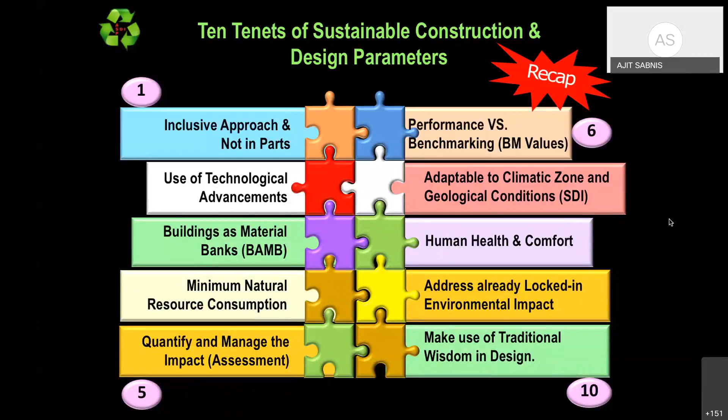We also discussed several important definitions and terminologies, and I intentionally left two or three important ones like embodied energy, embodied carbon, life cycle analysis, which we will take up now. But before we get to the actual definitions, I would like to see what exactly is the objective of the environmental management plan, which we call EMP.

To prevent or mitigate the damage to the environment due to the project by adopting best environmental management policies and practices specified in the contract and legislations gazetted by the Government of India.

Environmental management plan is a tool to implement environmental safeguard measures. EMP is derived from the outcome of the environmental impact assessment, which we are yet to see. So it is entirely based on the environmental impact we assess.

Section 202 of the Environmental Protection Act states that the purpose of EMP is to propose environmental protection commitments to assist the administering authority to prepare the final policy. This means incorporating and integrating the environmental management plan in our EPC becomes very critical in future.

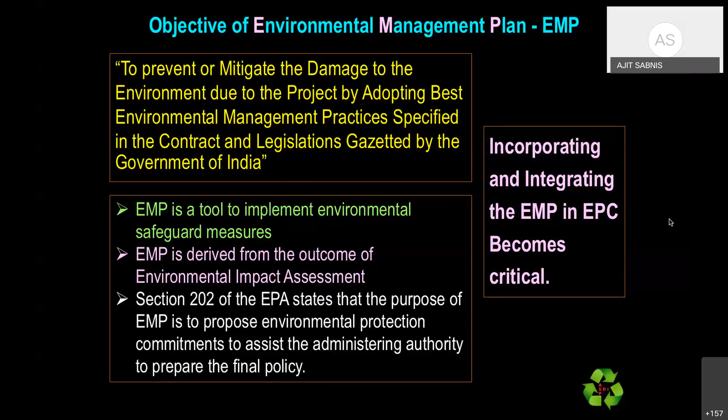Now, there was a question in the last session as to why so much focus is only on buildings and not on some of the infrastructure projects. So dear friends, this is the answer.

For example, domestic, commercial, and industrial energy consumption put together comes to about 73%, as you can see in the pie chart. That is why the focus is on buildings, which is actually concentrated more in the urban scenario.

When we take up national infrastructure projects, majority of them are exclusive projects where their function and service is looked into, and they do not come under the purview of the exact sustainability aspect, in the sense of the damage they create to the environment.

Am I audible, Rangna? Yes, yes. Rangna, kindly mute. Mute again.

So, dear friends, this is why we focus more on buildings.

Roads, for example, one important factor that affects the environment through a road project is habitat fragmentation, what we call it when it separates two habitats residing on two different parts of the road, creating a lot of confusion, especially in animal species. So habitat fragmentation is an important factor, and it's altogether a different scenario as far as the sustainability assessment of infrastructure projects, particularly roads and bridges, is concerned.

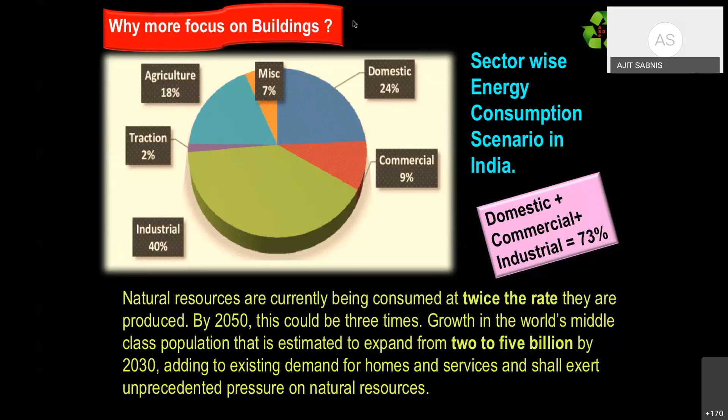Now, let us go to the next slide. What exactly is embodied energy? Embodied energy is the total...

Embodied energy is the total non-renewable energy that goes into the manufacture of a material from its extraction till it is consumed. It plays a very important and critical role in the choice of building materials.

This embodied energy gets classified into initial embodied energy, recurring embodied energy, and end of life energy. Initial embodied energy is the energy consumed in the entire process from the acquisition of raw materials to the construction of the building.

Let us take ceramic tile, for example, which is a very common flooring material used very commonly. What does it take for preparing ceramic tiles to come to us and get used in construction? To make ceramic tiles, we need the raw material and the processing of raw material.

Then it undergoes the manufacturing process, then it gets packed and delivered to the site. Now, the entire energy consumed in this process, whether it is fuel energy or electricity, power generated by clean energy processes or by burning fossil fuel, anything can happen.

All that energy included together, till the product comes to your site and gets implemented and consumed, that is the initial embodied energy. The recurring embodied energy is the energy consumed to maintain, repair, restore, and refurbish or replace the material components.

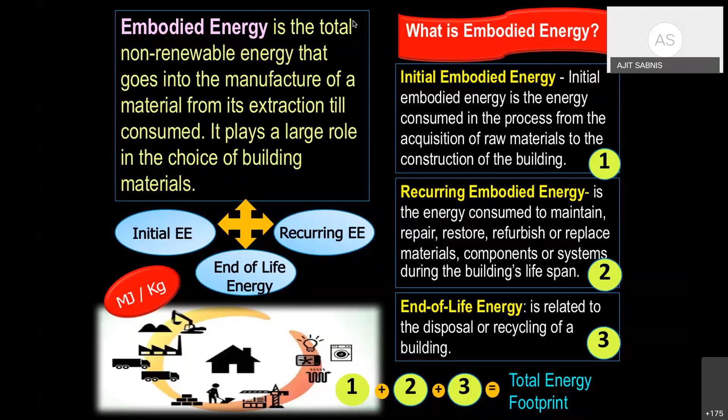Now, this is embodied energy. Now, what exactly is embodied carbon? Embodied carbon is the carbon footprint of a material. It considers how many greenhouse gases, or what is the quantum of greenhouse gas, that is released through the supply chain. Carbon dioxide is significant as explained in the first class - it is one of the most significant gases among the greenhouse gases, and it is often simply referred to as carbon emissions.

This embodied carbon is always expressed in terms of kg CO2 equivalent. That is because while taking all the other equivalent greenhouse gases into consideration - and we also talked about global warming potential in the last class - everything is converted and expressed in terms of kg CO2e per kg. It is estimated that about 0.098 tons of carbon dioxide is produced per gigajoule of embodied energy. Now, here I take a pause.

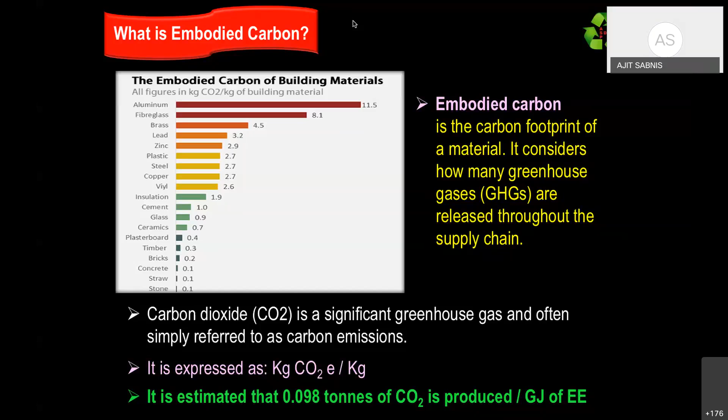Now we know what is embodied energy and what is embodied carbon. Let us look at what exactly is life cycle analysis, acronym normally LCA. This life cycle analysis can be applied to a product or several other things, but when applied to buildings, it can be defined as a method of assessing the sustainability levels of buildings and infrastructure projects from the pre-construction phase to the demolition phase, satisfying the cradle to grave principle.

So we also talked about the four principles: cradle to site, cradle to gate, cradle to grave, and cradle to cradle. Once we understand this in general, there are quite a few methods adopted in doing the life cycle analysis of buildings. But three of the common LCA methods are process analysis, input-output analysis method, and hybrid analysis.

Now, in the process analysis of LCA, what is involved is the data related to each of the processes starting from raw material extraction is taken into consideration and applied.

Now what happens is we really don't know - this non-availability of reliable and admissible data is actually one of the biggest problems, not only in India but any part of the world. It's extremely difficult to exactly monitor and get admissible data for what exactly happens for each event, and for every utilization - whether it be extraction, or whether the equipment doing it is efficient - all these things come into the picture.

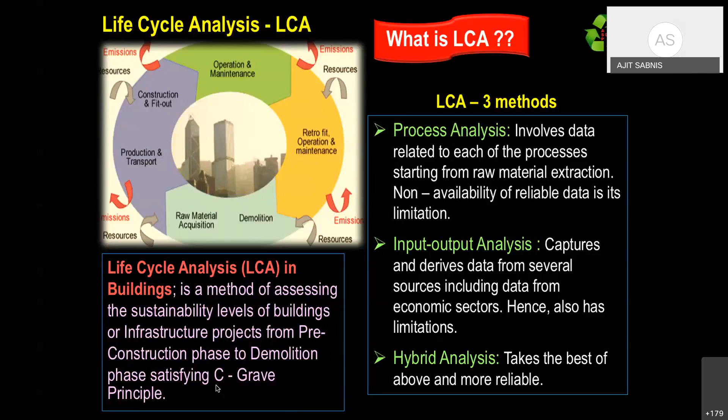Now, I would take the example, I hope you can all recognize this, Antilia, Mumbai, one of the world's most expensive homes. That is Ambani, Mukesh Ambani's residence, and this is the screenshot of Altamount Road, Mumbai, where you can see the helipad.

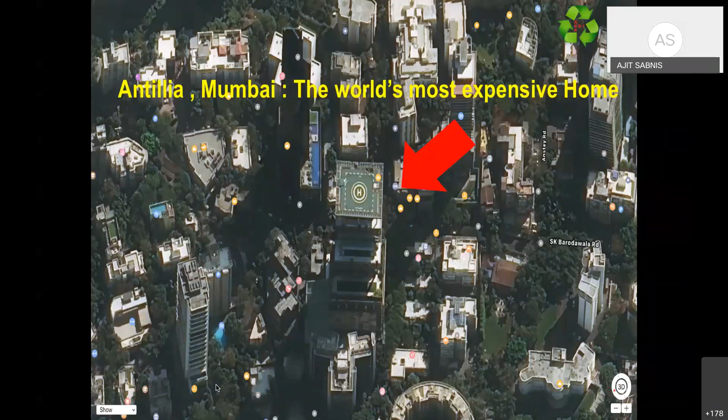Now, what is the detail available to us? You can see that this is one of the costliest places, and almost all buildings in and around this particular building are high-rise buildings. We all know it is one of the world's most expensive homes as per the Forbes interpretation.

Dear friends, it would be extremely wrong on our part to analyze such kinds of buildings and then normalize them or bring them to the common strata. It is not possible; we will have to eliminate these kinds of buildings. For example, Burj Khalifa - all these become iconic structures, never built with an idea to be sustainable. They just want that building to be the tallest in the world, period. So these are iconic structures which cannot actually be understood.

But out of curiosity, out of academic interest, I did this exercise and am placing it before you.

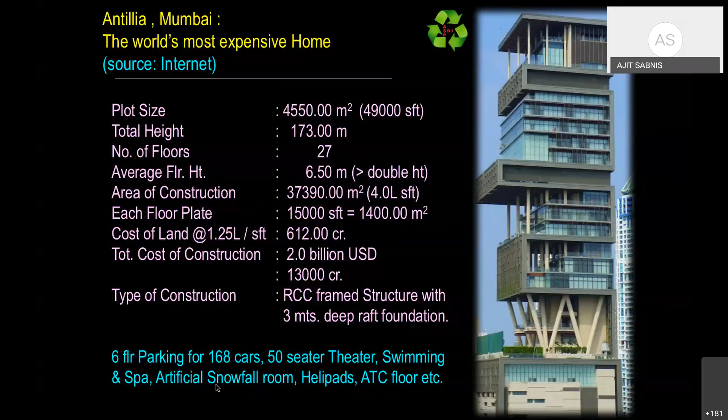At 173 meters, we normally go up to 58, 50, 60 number of floors, but here it is almost about 27 floors. Now, what do we get from this? What kind of analysis can we draw from this?

Now, look at this particular thing. We have understood that after accommodating for the cost of the land, consultancy fees and all those things, the approximate cost of construction could be about 11,500 crores. When we divide this, the cost of construction per square meter works out to be about 2.86 lakh per square foot.

Now, let us leave this cost aspect a little aside, because in this particular analysis, these cost stimulants do not come into the picture. Though it is an extremely important factor, when we analyze buildings using an embodied energy or embodied carbon perspective, the cost stimulants of the real estate do not come into the picture. That is why the United Nations Environmental Program insists on locally developed sustainability development indices, which we will come to later. Only from the embodied energy perspective, now look at this.

All over the world, for extremely opulent residential RCC buildings, the embodied energy ranges from 9,000 to 15,000 megajoules per square meter. So I have taken the least component here. Even taking about 9 gigajoules per square meter, the total embodied energy impact comes to about 336,510 gigajoules, which approximately is about 33.65 crore megajoules.

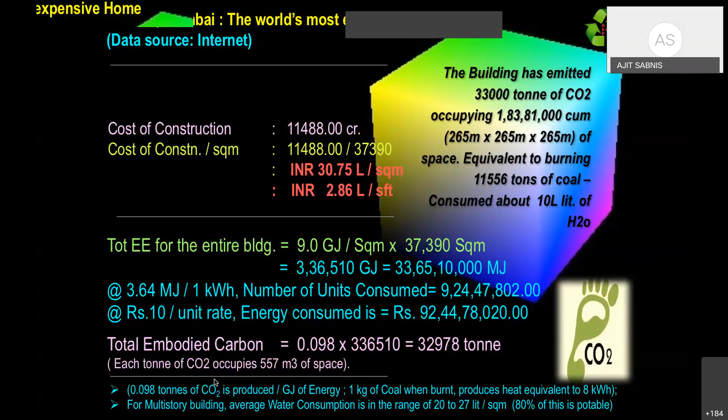Now, when you convert this into the number of units - we have 3.64 megajoules making 1 kilowatt hour, which is 1 unit of electricity - the number of units consumed is about 9 crores 24 lakhs 47,802, which at the rate of about 10 rupees, applicable for the commercial rate, means this building consumed about 92.5 crores worth of electricity during its entire construction period.

Now, for the total embodied carbon, assuming the thumb rule that about 0.098 tons of carbon dioxide is produced per gigajoule of energy, the total embodied carbon or greenhouse gas emitted by this one building is about 32,978 tons - meaning this one building has emitted about 33,000 tons of carbon dioxide, occupying almost 2 crore cubic meters of atmosphere, approximately equivalent to a space of 265 meters by 265 meters by 265 meters.

And it is equivalent to burning 11,556 tons of coal and consumes about 10 lakh liters of water.

And most of it is potable water, even assuming some treated water has been taken into consideration. Normally, 80% of the water is taken as potable water. This is on the assumption that for any typology of building, the average water consumption during the construction phase, the average construction consumption of water is about 20 to 27 liters. So this is a very approximate analysis of one building based on the data that is just available.

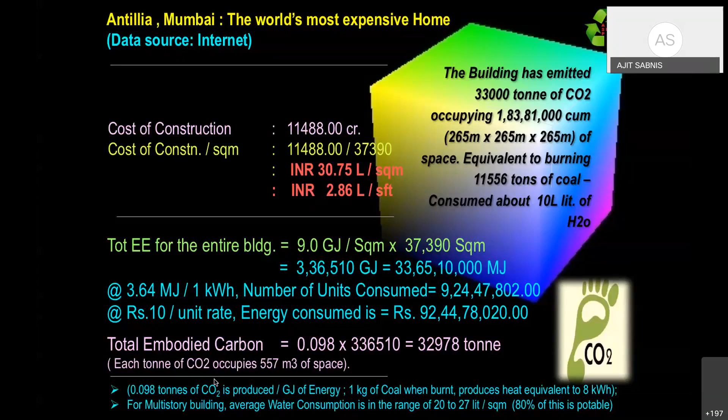Once this comes into the picture, this is for one building, and if a similar exercise is done for the cluster of buildings in that area, we actually know what damage the entire built environment is creating. Now, we will go to the next part of the analysis.

What is required is the sustainability assessment, and sustainability design calls for establishing what are called baselines. We call this establishing a benchmark, like we have a benchmark in surveying which becomes the referral point. Now we have the values of the benchmark building, and this is establishing baselines for further assessment and comparison.

The United Nations Environmental Program, from time to time, indicates what the benchmarks could be, or also gives the flexibility to choose at the discretion of the designer to select his own benchmark project. This means that, taking climatic conditions, local environment, availability of local materials, and entirely localized parameters into consideration, a designer has the flexibility to evolve his own benchmark project or benchmark baselines.

In this particular figure, the comparison helps show improvements in the overall energy performance of a building under assessment, and real energy performance values as compared to baseline values provide an indication of the sustainability level of a building in relative terms. Benchmarking of buildings provides a set of measurable baseline values that can be compared with the real-time energy performance values of a building to be assessed.

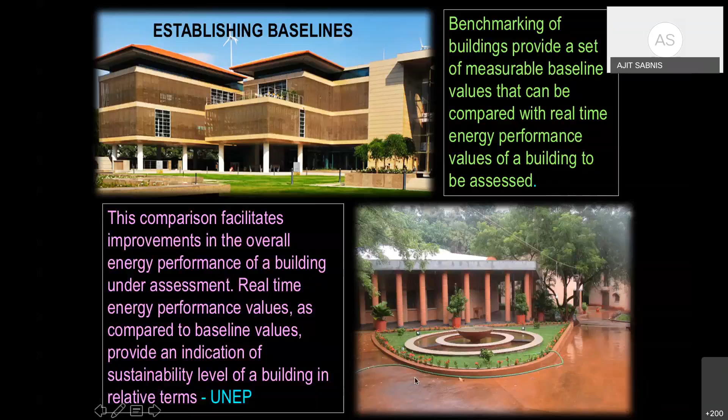Once we establish the benchmark, it's important that it also be evaluated by a set of certification programs. For example, any benchmark project we decide upon can be compared right now with available green building ratings, to check whether the building chosen fits into the bracket correctly. That evaluation of the benchmark project has to be done in comparison with already existing procedures.

For example, the one building which I had taken, we compared it with LEED certification credits. LEED certification has a maximum of 110 points, and the benchmark project we took earned about 101 points, which means it falls into the platinum category. We don't just look at numbers, but as I've repeatedly said, all green rating systems, or at least most of them, are criteria based.

However, they point us and take us through our journey toward sustainability in the proper direction, putting us on the right track. That is how these systems are extremely helpful, so cross-checking with established criteria can help.

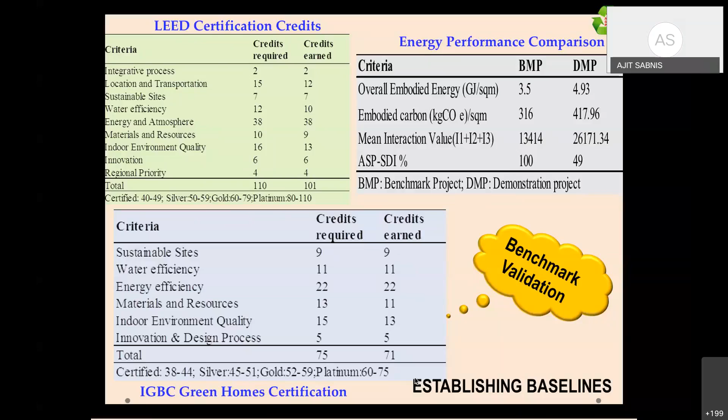For example, the project we took into consideration, the Antillia, comes to about 49% against 100% as against the benchmark project which we have taken. These are just an indication, to tell you indirectly how to go about it. So the benchmark project has to be evaluated with reference to other criteria also.

Just for the sake of this, there are green building ratings, almost quite a few. There are almost about 64, 65 well-known green building rating systems. Suppose we take out of which BREEAM, CASBEE of Japan, LEED of USA, Indian Green Building Council IGBC, and GRIHA of India, HKBEAM of Hong Kong, BREEAM of UK, Green Mark of Singapore. All these are actually quite well-known green building rating systems.

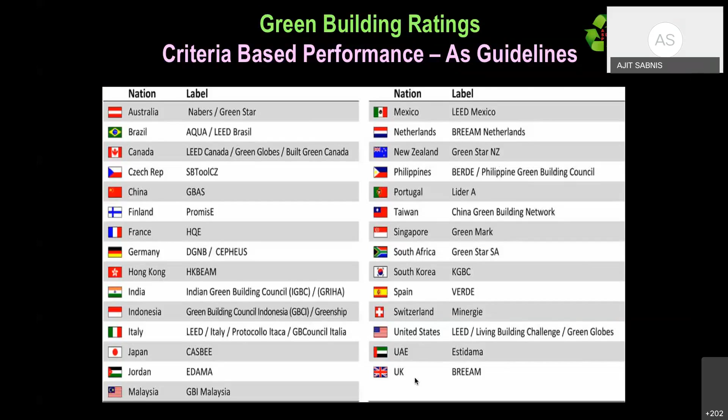What exactly are the green building rating systems, and why do we base only on criteria-based marking? We will just look at this. I've taken the IGBC rating criteria for homes, for home buildings. Now, these are the criteria.

For example, local building regulations compliance is required, that means it is mandatory. Without local building regulations, your building cannot even be rated. Then soil erosion control is mandatory. There are about 9 points as far as site conditions are concerned, as we can see it - topography and vegetation, heat island effect, roof insulation, all these different parameters. So totally about 9 marks for sustainable sites.

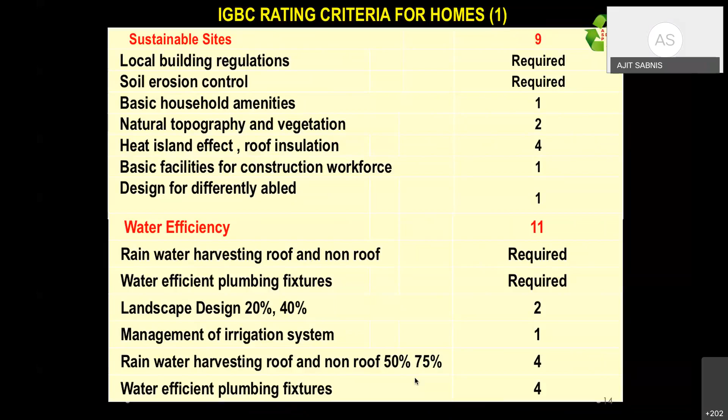For water efficiency, we have rainwater harvesting, water efficient plumbing fixtures, whether you have adopted landscaping, management of irrigation system, rainwater harvesting, water efficient plumbing fixtures, all these things. These are different criteria which we adopt, and then arrive at some kind of rating system, whether the building is X rated or Y rated.

And once we understand these ratings, we try to adopt the mitigation strategies. How can we go further? Now let us look forward.

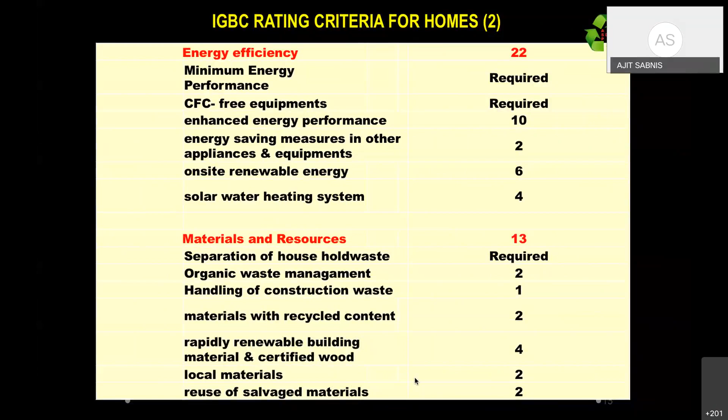This is again a continuation of what exactly is the material resources. Now, what we see in these things is, if you don't carry out certain criteria, you lose those marks, isn't it? So what is important is, there is a possibility that we can do this at the conceptual stage or the design stage, but all the stakeholders involved have to come together and take part. And one of the important sustainability design aspects is actually...

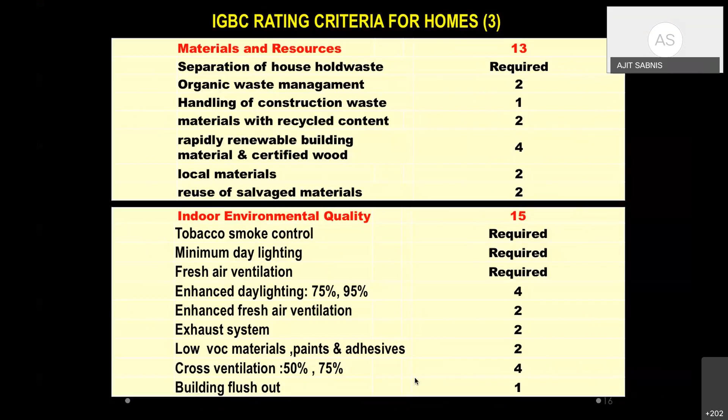To be very frank with you, the structural analysis algorithms do not change at all. What actually changes are the materials, and the properties of the materials that you use. The structural analysis part remains the same. So the loading pattern may change, loading may come down, but all other analysis remains the same. What actually has to change, I would put it that way, is the mind shift from linear to circular construction.

We already discussed in the last talk what exactly is linear construction and what actually is circular construction. Now, in the linear model, the feedback by the suppliers into the early designs - there is no feedback at all.

Site planning and design and approvals are done without suppliers or building contractor. Contractor is selected at a later date. Contractor selects the suppliers based on the approval of the suppliers, and if there is a list of approved vendors given by the client, that is taken into consideration. The end result is suppliers and constructors are normally not included in the overall design process at all, and they do not communicate with each other on the systems integration. This is one of the biggest drawbacks of the linear model.

Now, the circular model actually calls for entire transparency in the entire process, where everybody should be involved right from the beginning. The starting point here in the circular model includes even the potential suppliers and the constructors. Planning and designing include consultation with the potential suppliers and users. Transparency between all the stakeholders has to be maintained.

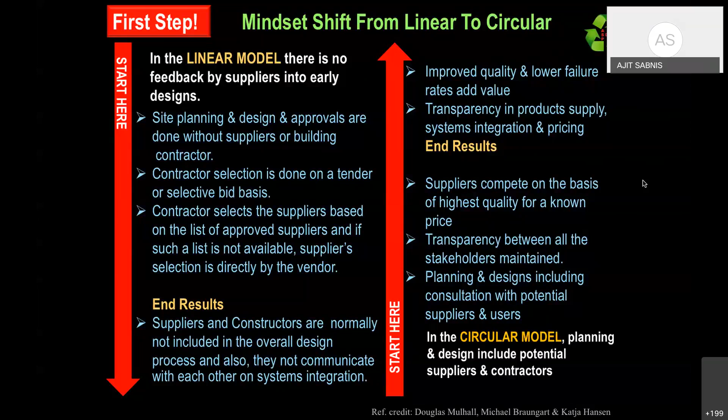Now, we have what is called RESOLVE. To begin with, this particular framework actually helps us to illustrate how the circular economy can be applied to sustainable design.

This RESOLVE stands for regenerate, share, optimize, loop, virtualize, exchange, etc. And regenerate is actually taking a shift from renewable energy and materials, to reclaim. All these things come into the picture, and this is one of the important aspects which we have to take while we apply the cradle to cradle basis.

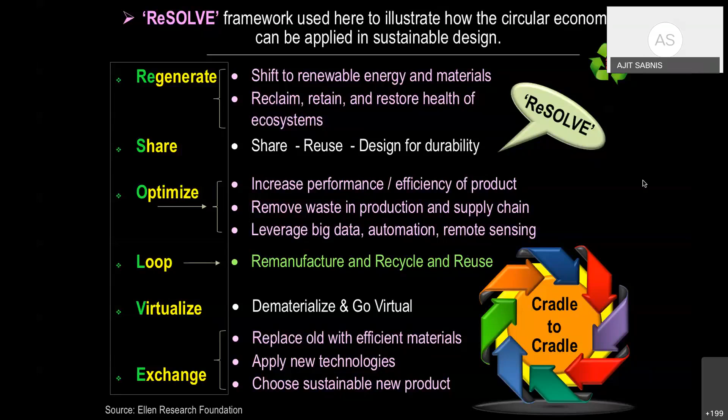This is another example of a low energy building, one of the community dining halls I was involved with. The embodied energy is about 3,600 megajoules per square meter, and embodied carbon is about 370 kilograms CO2. It's a regular RCC frame with concrete louvers completely integrated with the outside nature, and natural stones for the flooring. This is a typical sustainable, low energy building which we were dealing with.

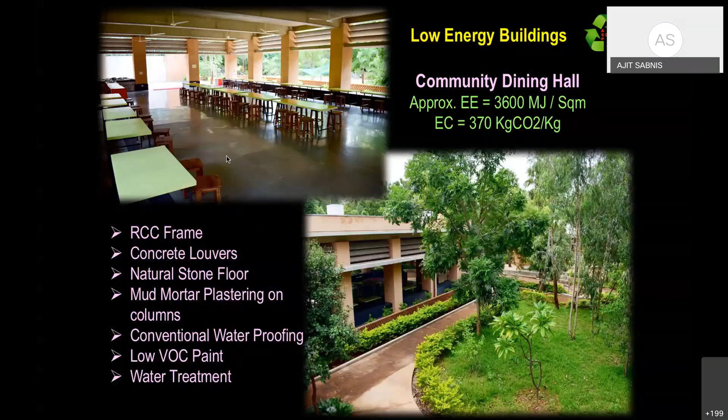Now let us see how do we peg the preliminary environmental performances. Let us begin with what exactly is step one and what are the different parameters we need to consider. The first and foremost important thing is to peg the preliminary environmental performance targets.

Now, what are those preliminary targets? Energy, water, materials, economic performance, landscape, indoor environmental quality, waste, and construction practices.

When it comes to energy, we can think of what kind of energy is used, what is the source of energy, whether it is a clean energy option, what kind of transport do you use, etc. When it comes to water, what kind of water do we use? Is it treated water, what kind of harvesting are we doing, and what is the way we are trying to conserve water?

When it comes to materials, whether it is recycled materials, salvaged materials, or locally available materials. When it comes to economic performance, the life cycle assessment, as already discussed, has to be done. And for landscaping, we need to understand the ratio of softscape and percentage of hardscape without affecting the microclimate, which we also discussed in the first session.

Indoor environmental quality involves the kind of air pollution, indoor ventilation effectiveness, air filtration, system commissioning for cleaning, and daylighting. All these things come into the picture as far as indoor environmental quality is concerned.

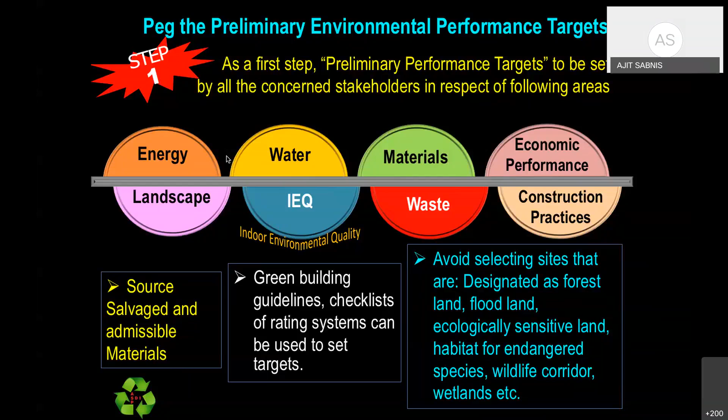All these things have to be considered. The second step is to protect or enhance the site's ecological integrity, which comes into the picture.

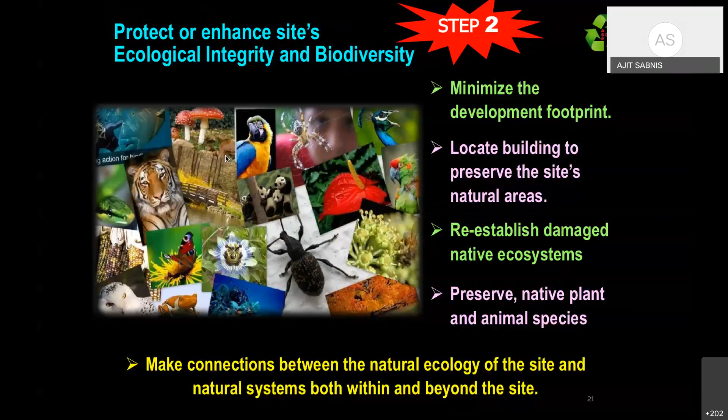Now we have to minimize the development footprint. This includes parking, building of roads, clusters of buildings coming together, then locating the building to preserve the site's natural areas, re-establish damaged native ecosystems, preserve native plant and animal species, and make connections between the natural ecology of the site and natural systems, both within and beyond the site. This is the second step which we take into consideration.

Install oil and water separators to treat the runoff from parking lots. Lot of methodologies to capture runoff water have to be taken into consideration. Design the roads and parking lots without curbs, or with curb cuts, so that the water can easily flow into the drains.

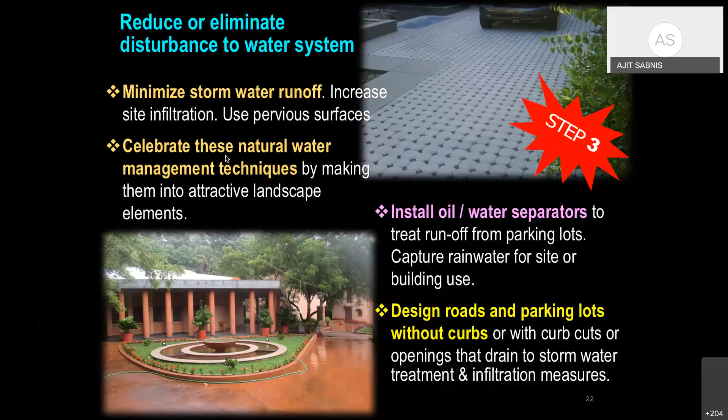The next important step is to prevent or reduce the use of potable water for irrigation. Rainwater harvesting comes into the picture. Use recycled storm water, or site-treated grey or wastewater, for irrigation. Use water efficient plants, often native species or species that have adapted. Use water efficient irrigation, including micro irrigation, moisture sensors, and weather controllers. Reduce urban heat islands, which we have talked about in the previous session also.

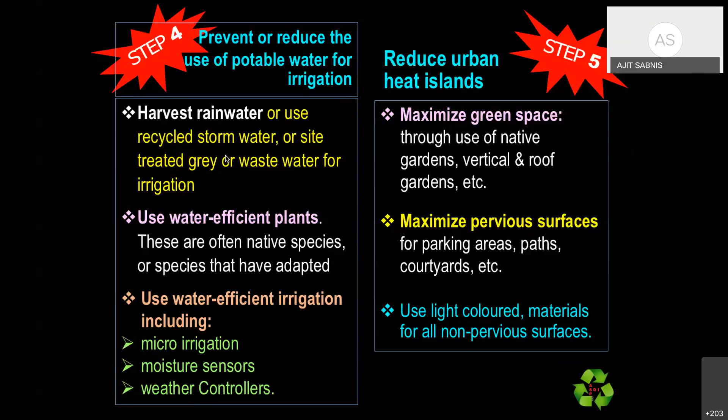This happens by maximizing the green spaces through the use of native gardens, vertical gardens, roof gardens, everything. And we also can maximize the pervious surfaces, as we talked earlier, use light colored materials for non-pervious surfaces, etc.

Now, one of the next considerations is the building orientation itself. Use existing and proposed trees and plantings to reduce heating. These plantings can actually reduce the summer solar gain, channel summer breezes, and block the winter winds while still allowing daylighting.

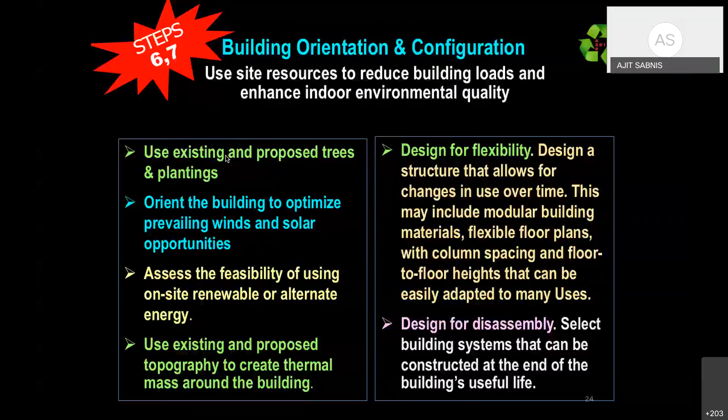I have put a little more data into the slide because subsequently, if this doesn't get completed, one can go through the slides and try to understand the whole concept of what exactly is the thing.

We need to give importance to locating internal spaces to optimize natural ventilation, daylighting, and site resources like trees or topography for shading, create operable windows where air quality is good and where prevailing winds will create desired internal pressures. All these things actually can be adopted.

Use low VOC materials and use structures that do not require finishes that emit volatile organic compounds.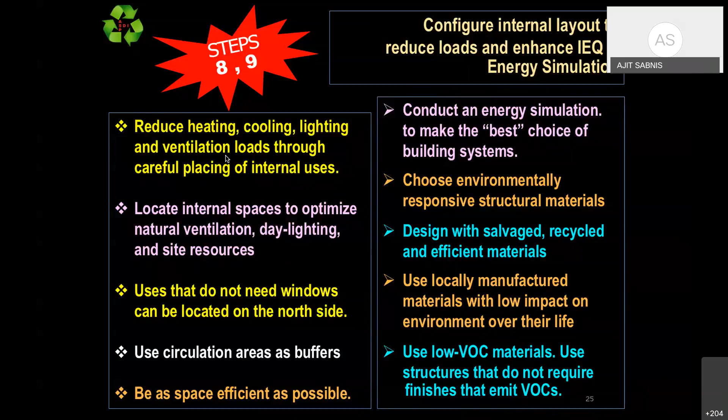Now, we also look into designing the envelope while optimizing the internal environmental quality. The envelope design takes paramount importance. While designing the envelope to bring in the daylight, use as much of the inhabited floor area as possible. Then design the envelope to provide adequate fresh air, which becomes extremely important.

These two projects that are projected, one of them the United Nations Environmental Project in Pondicherry, where I'm involved. It's a 4-bedroom, kind of a community guest house, and each floor has about 4 bedrooms. So we have an 8-bedroom building, and the total embodied energy we could achieve is 2,800 megajoules per square meter.

Whereas, as I said earlier, the typical concrete building, even with the frame, the building we see doesn't entirely contain an RCC frame. Yes, there is minimal RCC work involved. So instead of 9,000 megajoules, it is reduced to 2,800 megajoules. And instead of about 600 embodied carbon kg CO2 per kg, we could reduce it to 360 kg CO2 per kg.

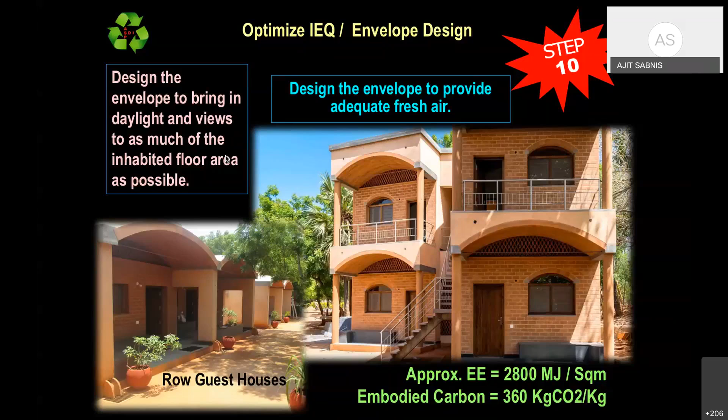So this is another important aspect other than envelope, which actually leads to good indoor air quality, and good indoor air quality encompasses factors such as maintenance of acceptable temperature that is good for human comfort, relative humidity, control of airborne contaminants, and adequate ventilation. All these things are actually required.

The indoor air quality also relates to the National Building Code, which talks about the minimum requirement of window to floor area ratio, and there is a very detailed table given for exactly what could be, especially about the fenestrations and the openings, the percentage of openings, what is comfortable to human nature, and these things can actually come into the picture.

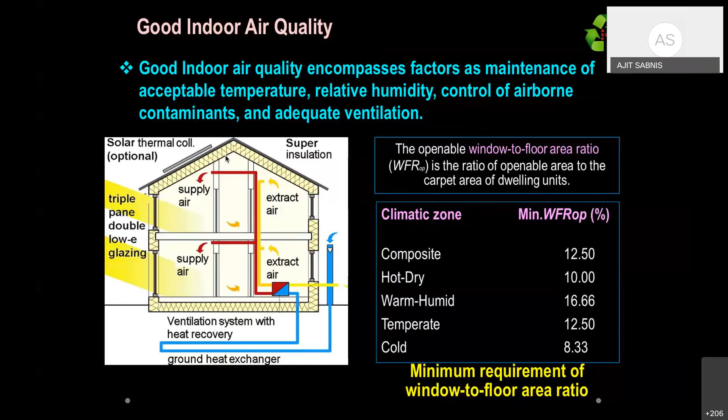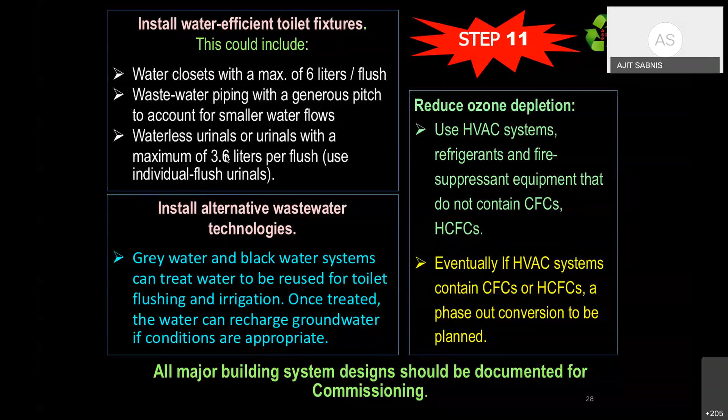How can we incorporate these strategies to reduce ozone depletion? That means use of HVAC systems, refrigerants, and fire suppressant equipment that do not contain CFCs and HCFCs. This has become a mandatory thing now, and HVAC systems containing CFCs are being phased out over time. All major building systems designs should be documented at the time of commissioning. This becomes an extremely important factor.

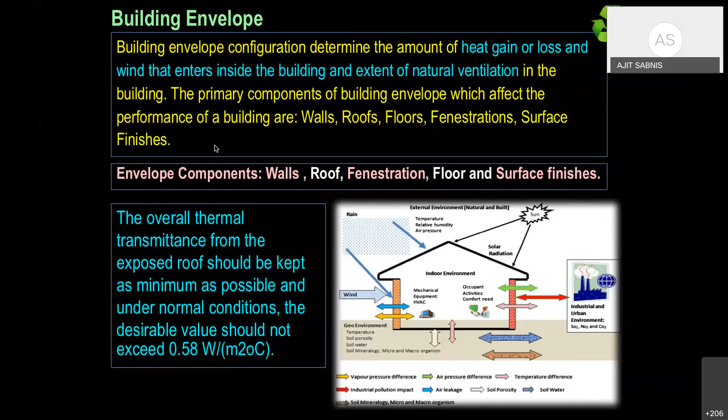Now, the building envelope is an extremely important aspect. This configuration determines the amount of heat gain or loss into the building, and the extent of natural ventilation that comes in. The primary components of the building envelope affecting performance are the walls, roofs, floors, fenestrations, and surface finishes. The envelope also imparts thermal transmittance from the exposed roof, which should be kept at minimum under normal conditions, with a desirable value not exceeding about 0.6 per meter square degree centigrade. This is one of the important criteria of building envelope to be considered.

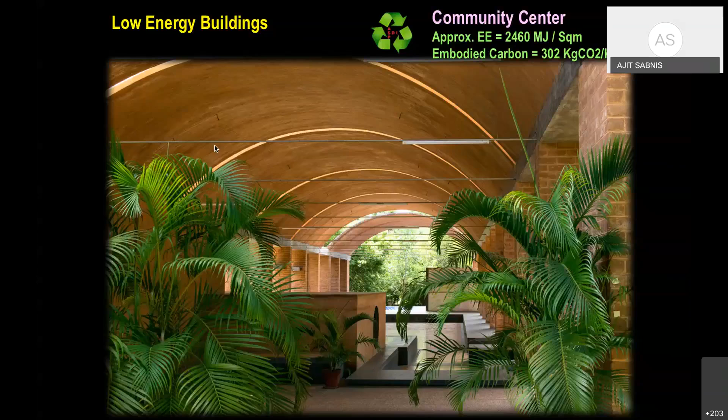This is another part of the community hall area shown earlier. In this community hall, we achieved about 2,460 megajoules per square meter, with embodied carbon around 302 kilograms CO2e. We ran cooling pipes in the flooring itself, so cold water circulates, hot water goes out completely, and cool water circulates to maintain temperature. Outside temperature is about 40-45 degrees, while inside is approximately 34-35 degrees, mainly because of the cooling and the shape, along with openings that allow cool breeze to come in.

Now we come to the alternative building materials which come into the picture. Before design, we need to consider what the alternative building materials are. An ideal sustainable building material is not only environmentally friendly, causing no adverse impact on occupant health, readily available, reclaimable, recyclable, and made from renewable raw material, but also uses predominantly renewable energy in its extraction, production, transportation, fixing, and ultimate disposal. This is why it's called an ideal sustainable building material - it's impossible to get this kind of material, which becomes a utopian case.

So what's important is we should consider low embodied energy materials, which I'll show in the next slide. We should maximize use of recycled and reusable content, give preference to locally available materials and skills, consider rapidly renewable materials, and select materials compliant with clean air, clean water, emitting few or no carcinogens, toxicants, VOCs, etc. Though it's impossible to get ideal sustainable building materials, we should keep these things in consideration while designing a building.

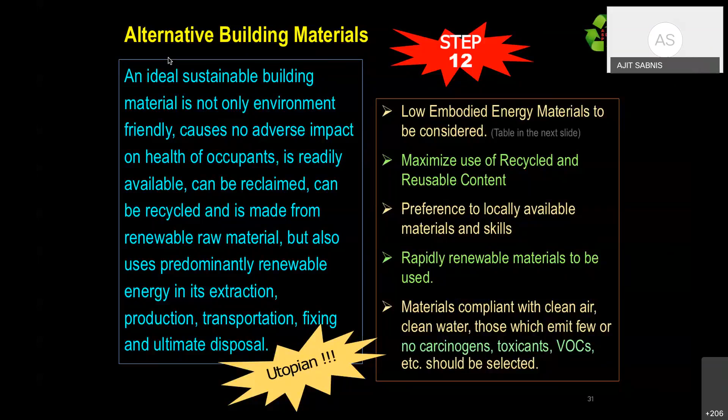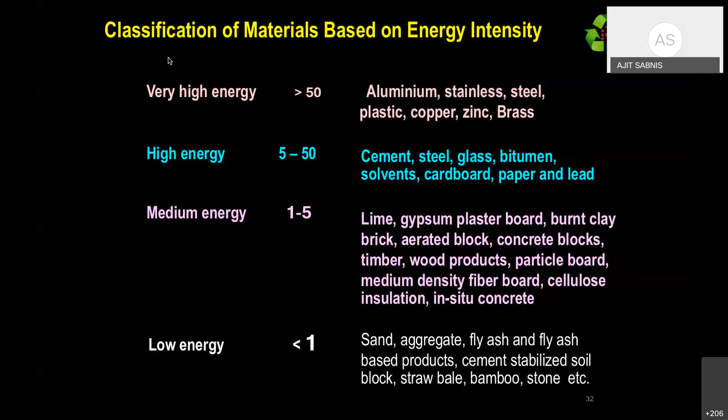Most building materials are classified into very high embodied energy, high energy, medium energy, and low energy components. In this table, greater embodied energy with a value greater than 50 megajoules per kg is considered very high - for example aluminium, stainless steel, plastic, copper, zinc, brass all come under very high embodied energy. Very low energy materials include sand, aggregate, fly ash, stone, bamboo - these come into low energy components, for example walls constructed with rammed earth.

Friends, I think I have come to the last part of this, and hopefully I have taken a little more time than what was expected. But however, the session topic is covered with these 12 to 14 important parameters which we have to keep in mind for a sustainable design.

Thank you very much, Dr. Ajit Sabnis. That was a wonderfully presented presentation, which actually made us all think, and with the illustrations especially, it made things that much more clearer.